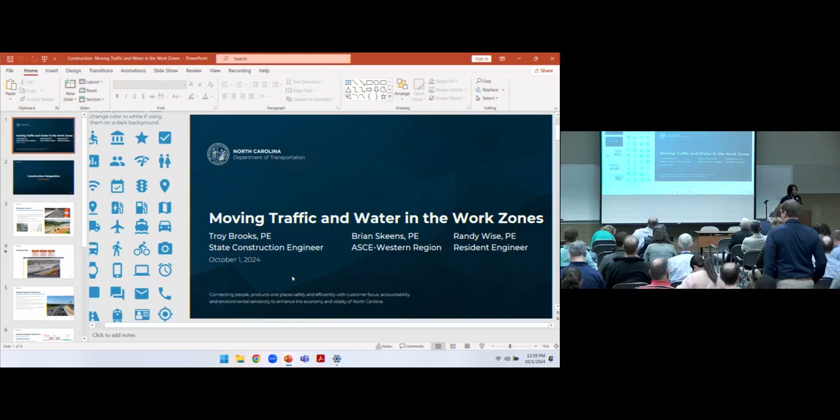All right, thanks everybody, we got a good crew here today. We've got construction, Brian Skeens and Troy Brooks from construction. We got Randy Wise from ICE, hydraulics will be me, and we got Justin Beaver from Work Zone Traffic Control, and Michael Lindgren from Roadway. We're just going to go through some presentations, talk about working in the work zone and traffic and water and how that moves through that area, and what we can do to make it better, to make sure we're doing a good job on our design so that the transition from design through construction and final completion works well. Looking forward to this session, and I'll kick it off to construction here, Troy.

Thanks Matt, I'll get her fired up here. My name is Troy Brooks, I'm the state construction engineer for NCDOT. I've got with me today Brian Skeens, and you're going to hear from him in just a second. He's the assistant state construction engineer for the western region of the state. I wanted to first thank the technical services group for inviting the construction guys up here to give you a shout and give you a perspective on what we're seeing as far as moving traffic and water in the work zone. It's a huge challenge that we face, and we're going to get into some of those details, but we certainly appreciate the invitation and the opportunity to speak in front of y'all today.

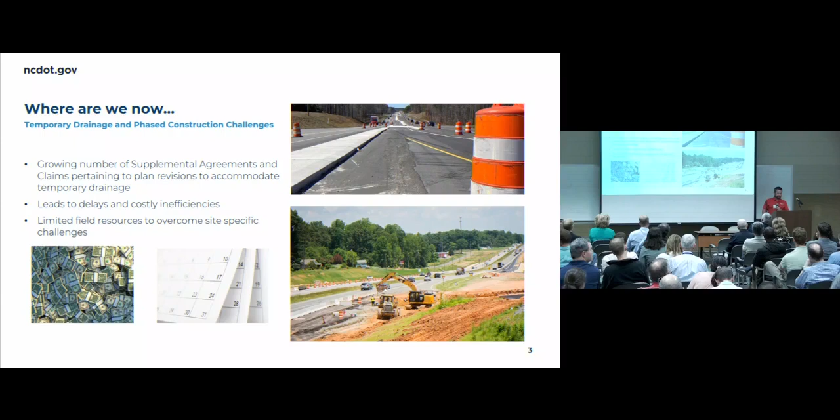So with that, I'm going to turn it over to Brian, and he's going to talk a little bit about what we're tasked with, managing risks, our folks in the field, as well as the contractors and their project teams as they think about managing risk. And we're active, we've got a contract and we've got a set of plans, and we're getting to work.

Yeah, so obviously, as a department, our number one priority is safety. Safety of the traveling public in these work zones, and dealing with the water, just in a normal rainfall, not anything like we've experienced last week, but just normal rainfall.

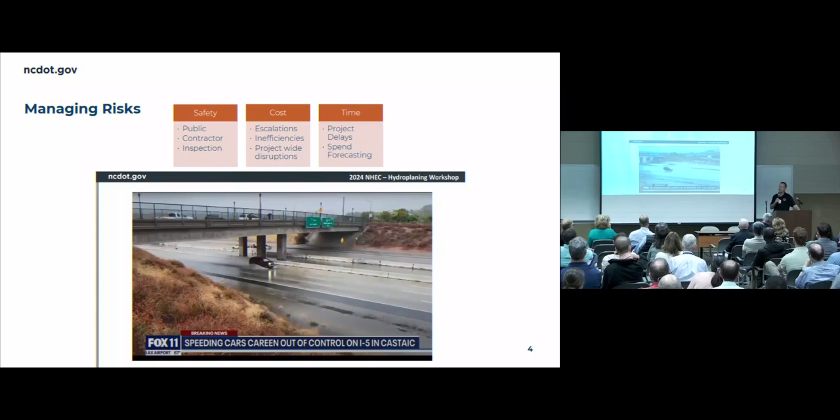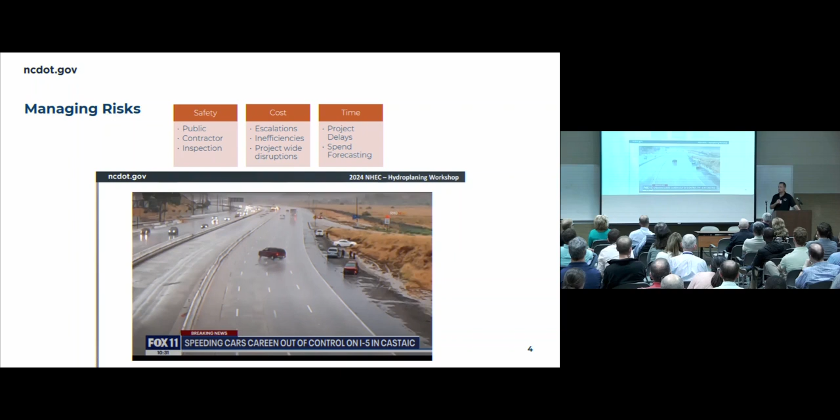I think about projects like I-26 in Buncombe and Henderson counties. It's very narrow through there. There's portable concrete barrier in the middle, slopes up on both sides, and just not a lot of room. And when it rains, it can get kind of hairy through there, multiple backups and multiple accidents. So just think of those things as we're looking at temporary traffic shifts and wedging. You think about wedging and the different stages of wedging that have to take place. It doesn't always get accounted for, like where's that water going to go once you build up on one side or the other?

We think about our contracting folks out there trying to do the work and trying to avoid getting caught up in an accident. We've had several fatalities recently, not necessarily due to water situations or drainage in general, but just contractor fatalities and our inspection staff that are out there trying to make sure these projects get built. So again, safety just needs to be number one.

But then, things that we run into that we have to try to manage on these projects, cost is the big one. These projects are certainly not getting any cheaper. They're more and more expensive now than they've ever been. And then when you tack on having to make adjustments and make changes in the field, that just leads to escalations. They're wanting more money. Materials are going up.

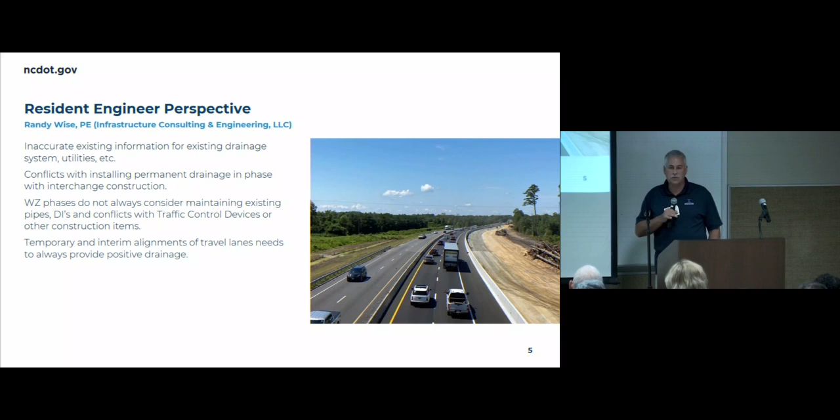The last point I've got, kind of the same but a little different, is that as you go through each phase, especially for traffic control folks, make sure each phase can control and has positive drainage. So you're not flooding the roadway for the traveling public, and you're not flooding property and so forth.

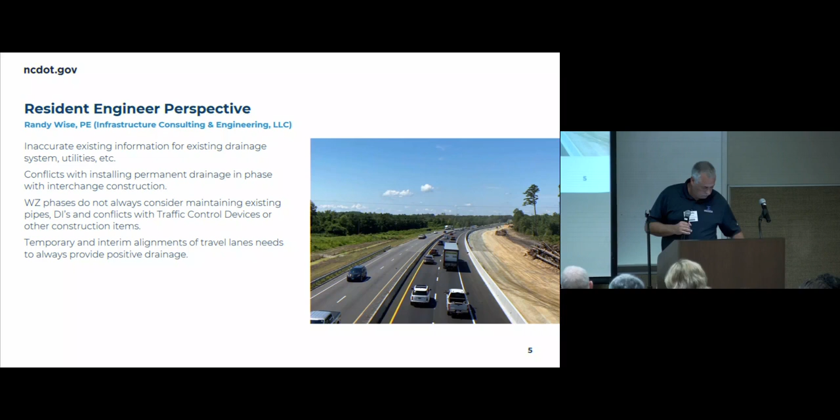So I've got a few examples, 3 particular items. This is a typical situation we ran into at some point. Basically, the premise here was to do temporary widening on the inside. This is a 4-lane to 8-lane widening.

Temporary widening on the inside, shift traffic inside, do the construction on the outside, finish the inside. Very simple. The problem is when you push traffic in and you're supposed to do the widening on the outside, that final surface elevation in this particular case, as you can see on the drawings, is 7 to 8 inches higher than where the traffic is. That becomes a problem, especially when no temporary drainage was accounted for.

In areas such as the west, it may not be as much of a problem because you have more grade. When you're down east, you have a lot of flat area, a lot of level grade. And so this water can accumulate and potentially flood the entire road in not-so-big storms.

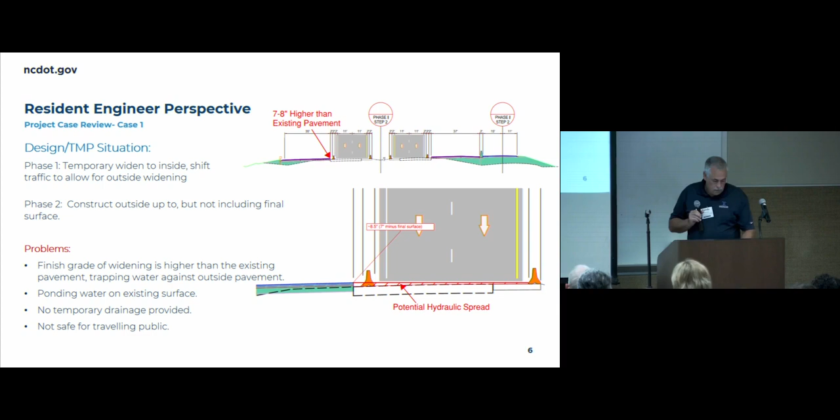So it's things like that that we have to deal with in the field, where many designers say, well, they'll just handle that in the field. But like Troy mentioned earlier, sometimes that's costly, and sometimes it creates a lot of delays.

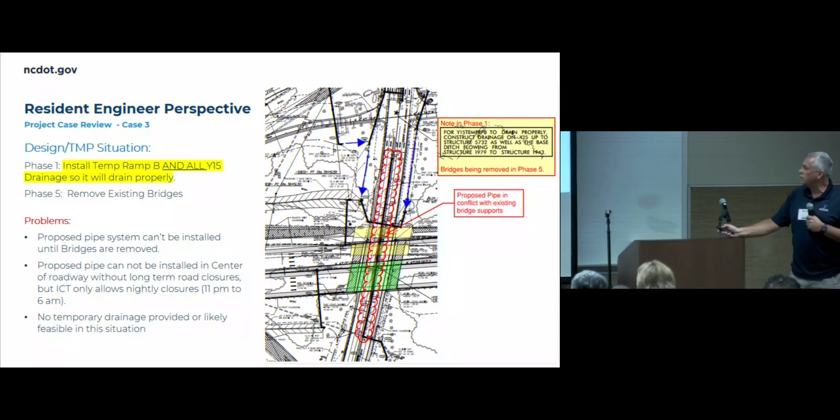Does anybody see the problem with that? So down here's my bridge I'm building. Right here's where the existing traffic is, southbound, northbound. So the drainage has to go in phase 1, but the bridges don't come out till phase 5. Drainage goes right under the existing bridges, right through the existing bents of the bridge.

So it's not really buildable like it is. It's a large pipe, 54-inch, about 10 foot deep. So you don't really have room to even place that under the low existing bridges, even if you could eliminate one side or the other.

So just things to think about. I threw 3 problems out there. They're going to talk a little bit about solutions, not necessarily about this, but some of the things they cover and some of the things I think traffic control has asked of the designers. Hopefully some of these problems will go away. I'd leave you with 2 things to think about: if something don't look right on the plans, it's probably not. Had another situation one time with an interchange, had a box in each corner.

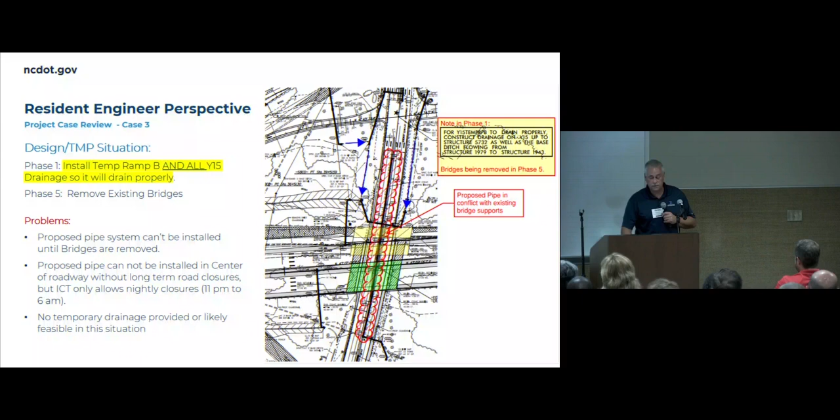They were all four connected with a pipe. That's not possible hydraulically, if you think about it. So if something doesn't look right, it's probably not right. Get out and look at projects, look at construction that's going on. I'm sure any resident in the state would be glad to have you come out, walk you through the project, see what you see if you see problems. Could be your project, could be somebody else's. I think there's things to learn on all of them.

You want to take questions or pass it on?

Looks like you, right?

My name's Justin Beaver. Ken is not here today. He's helping route traffic for the hurricane out west. So he called me this morning and said, hey, can you do this? So bear with me a little bit. We're going to talk about temporary drainage in work zones as it applies specifically to the TMP designers, and move forward with some examples.

Quick disclaimer, you're going to see some examples of plan sheets. It's not calling anybody out, that's just what we had readily available. A lot of these plans went through the field inspection phase, and some of these issues have already been resolved.

So first thing I want to touch on is chapter 1 of our TMP design manual, which talks about drainage specifically. I copied some language from that - you see highlighted here that all drainage issues need to be addressed by all units. That's one of the things we struggle with a lot, the coordination between roadway, hydraulics, signals, all these groups. It's up to the TMP designer to catch those things and not necessarily find the solution, but pose the question.

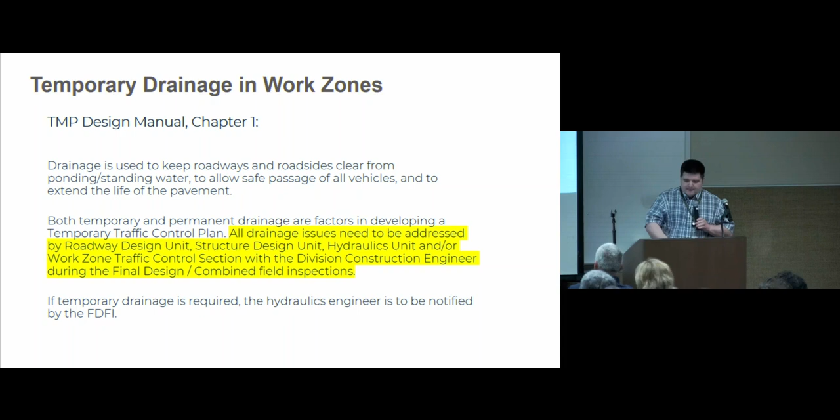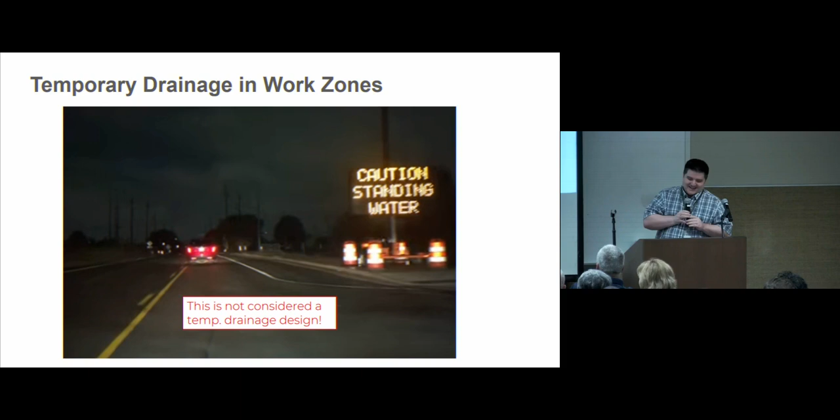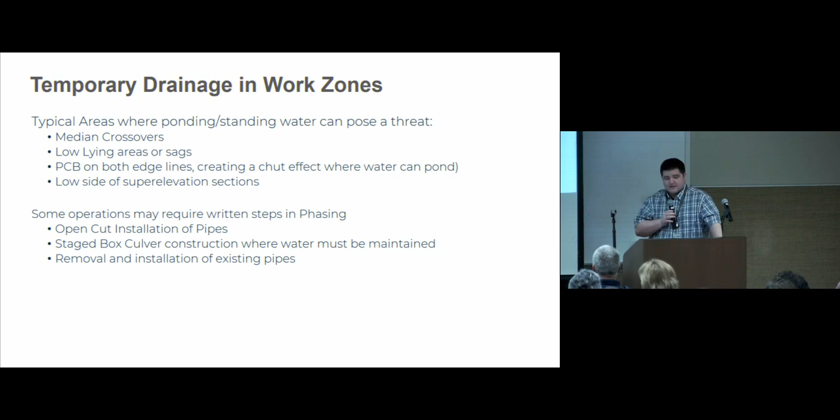So another excerpt from our design manual covers common areas where you might find problems with temporary drainage that you might want to look at a little closer. Just listed some here: median crossovers, sag areas. Some of these are obvious, but sometimes they happen without you knowing. With PCB, we use that a lot, especially in urban areas, and that can pose a big issue. Other areas that have to be spelled out in the phasing: open cut installation - I think Brian alluded to that earlier - stage box culvert construction, and pipe installation, especially wet utilities. That's another big thing we've had recently.

So when thinking about drainage, location definitely matters. Just a few examples here: in the western region, you have a lot of steeper slopes. A lot of times water gets off the site quickly, but it can cause channelized flow instead of sheet flow across roadways, and that tends to cause more hydroplaning. In our central region, between Charlotte and Raleigh, we have a lot of multi-lane highways - you have spread issues, you have a lot of super elevation issues when you start dealing with construction. And then out east, as Randy alluded to, you have a lot of ponding of water because there's no fall. So depending on where you're at, you might have to propose different solutions to TMP designs.

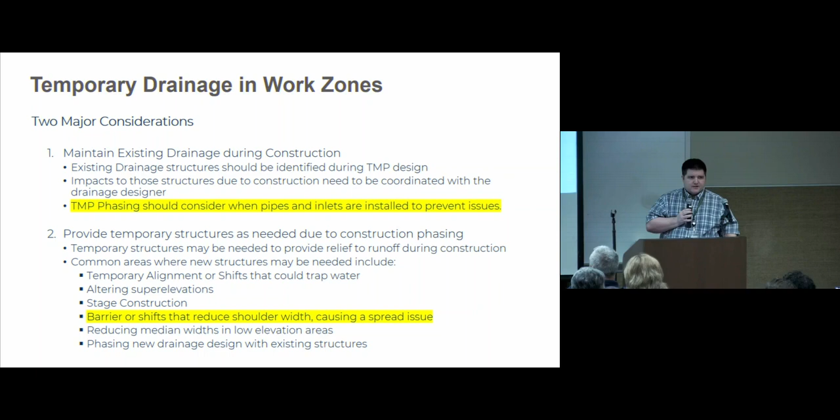The big takeaway here is there are two major considerations when you go into a TMP design regarding temporary drainage. First is to maintain the existing drainage during construction - that's identifying the existing structures, making sure water still collects in those structures, and making sure impacts to those structures during construction aren't affecting the existing drainage of the facility. The phasing should consider when pipes and inlets are installed to prevent issues. The second big takeaway is, if the existing drainage is not adequate during construction, to install temporary drainage to satisfy it. There's a lot of issues where that's brought up. A few things I'll list: stage construction, temporary alignments, barrier shifts. Spread is a big one, especially on bridges. Curb and gutter sections is also big, and you'll see an example of that later.

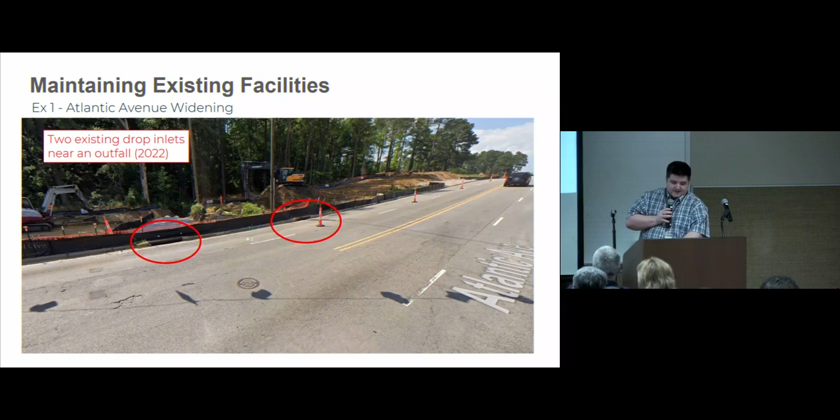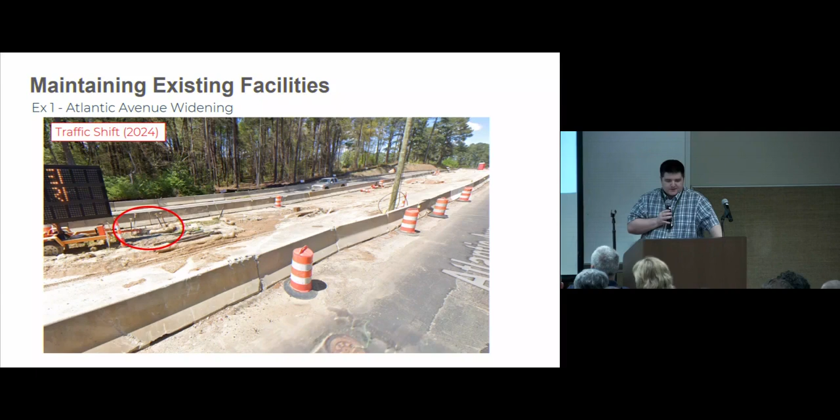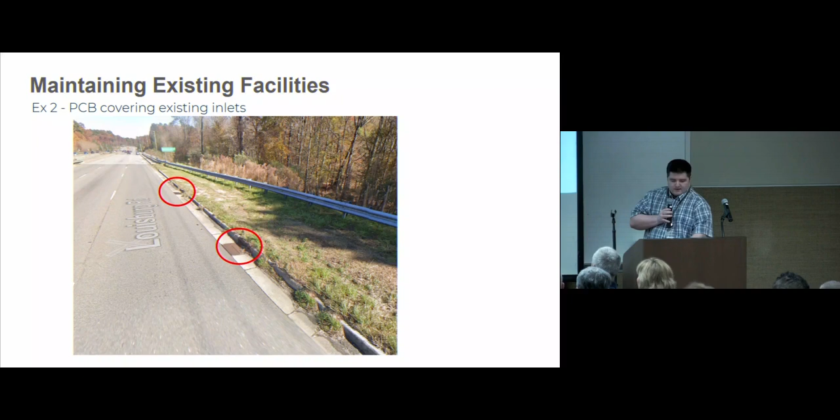Another example here, you see there's two inlets approaching a bridge on the curb. We're having to widen this bridge, so we're having to put PCB and fix the slope. Well, when we put PCB, it goes right on the curb line. A lot of times what this causes is the inlets to be jeopardized and water not able to flow in, and you have spread issues and ponding of water in the lanes.

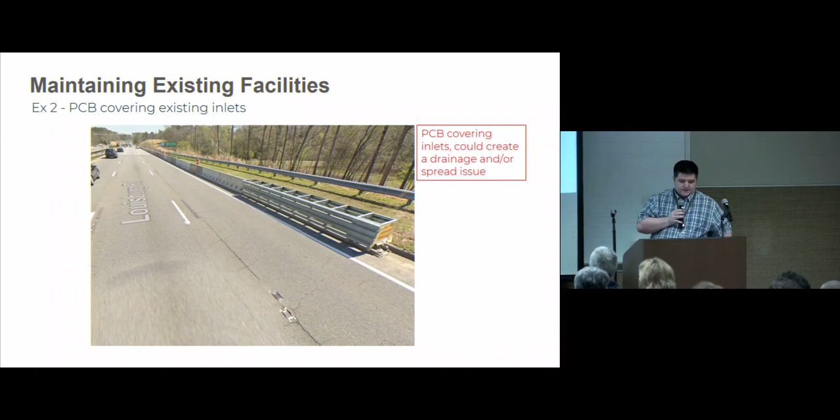Something you can find out pre-plan is, hey, does this require temporary drainage? Like I said, it's not our concern to solve the issue right away. What we need to do is ask questions to the drainage designers of, does this need to be addressed?

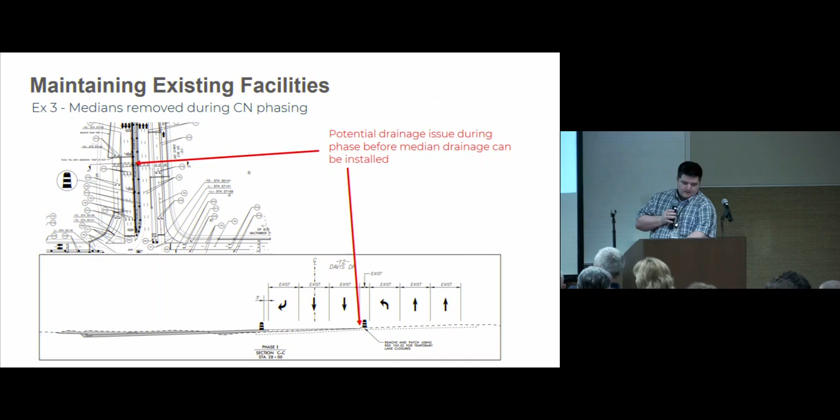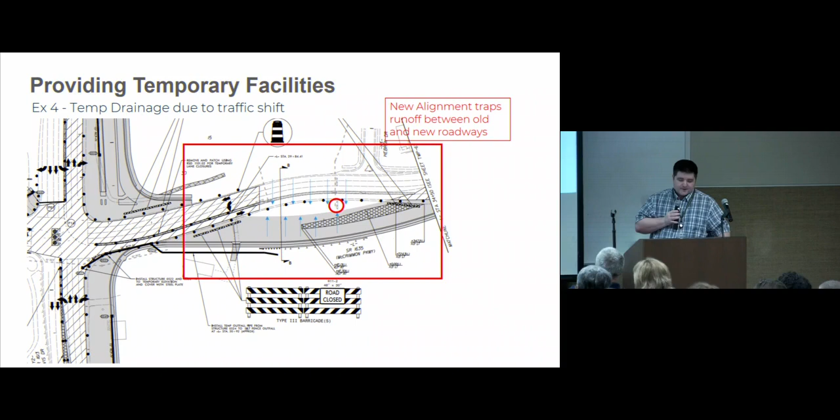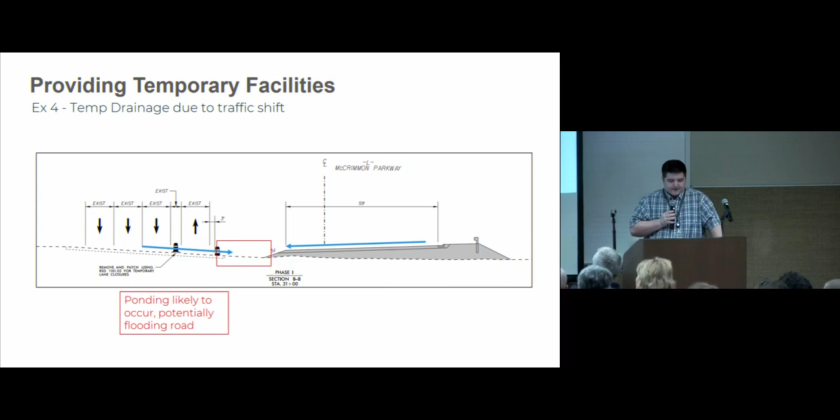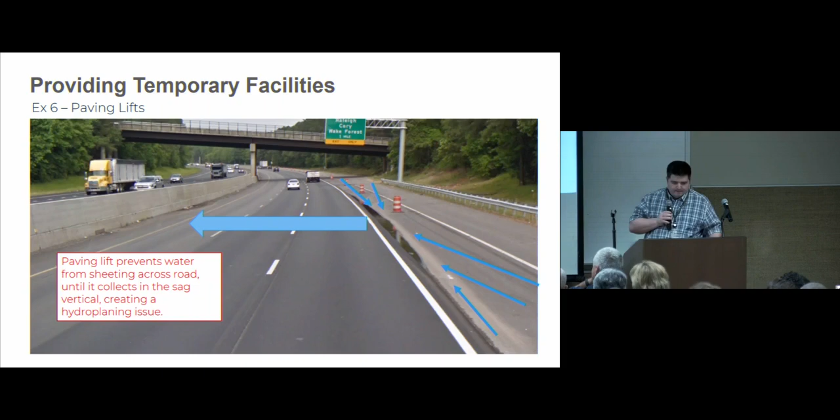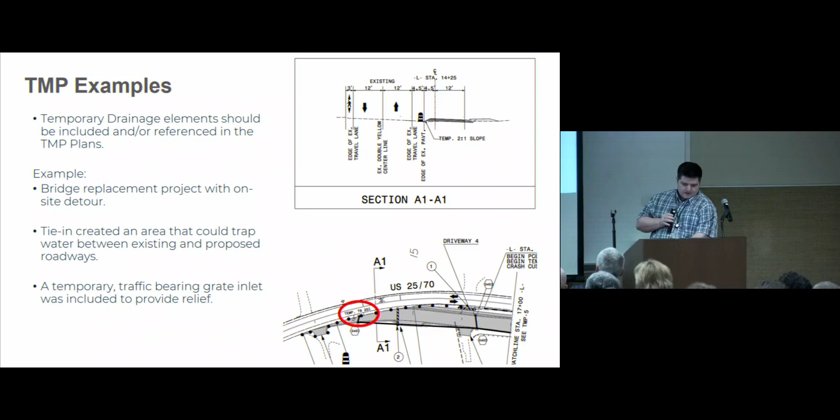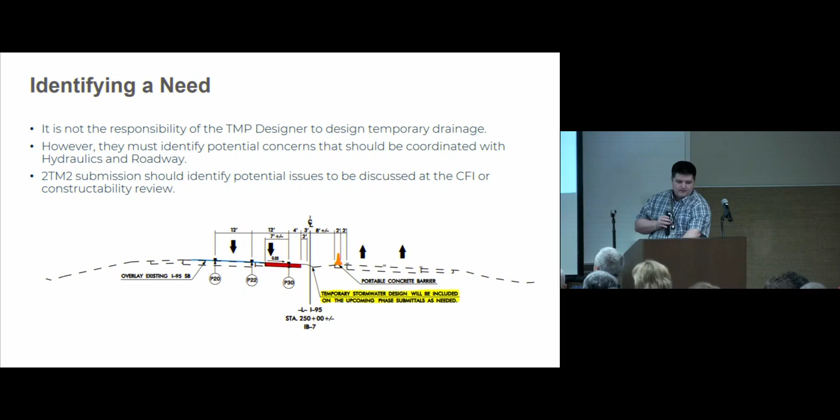So I want to talk about temporary alignments real quick. That's one of the things we've talked about recently. Typically, whenever we send a temporary alignment to roadway to design, they'll design the alignment, they'll send it to hydraulics, and hydraulics will look at whether temporary drainage is needed.

So this is one of the key points when you're doing TMP designs. If you encroach on medians and take away some of that drainage area, then you should ask the question to drainage, hey, you should look at this.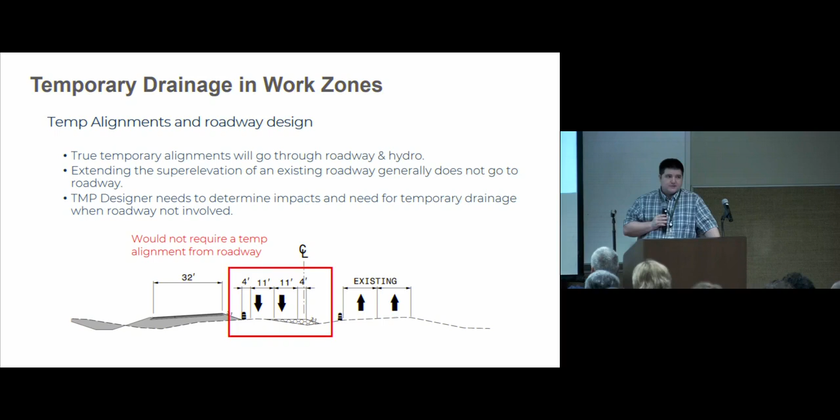A couple things we tried to accomplish in our PDN process, this is our 2TM2 and 3TM1 with WorkZone specifically. We have language in there that does cover that it should be looked at, temporary drainage. And it's not always accomplished. Just highlighted some areas here, you can read them if you can see those.

Another thing to cover too is the 2TM2 part of design. Those plans, I know we went from like a staging to a 50% to a 90% and to a final. Now we just have 2TM2 and 3TM1. We're really kind of expecting the 2TM2 to be almost what 50% used to be, not necessarily what staging was. And the idea there is that we want enough substance there to be able to review it at CFI and not have too much there to talk about.

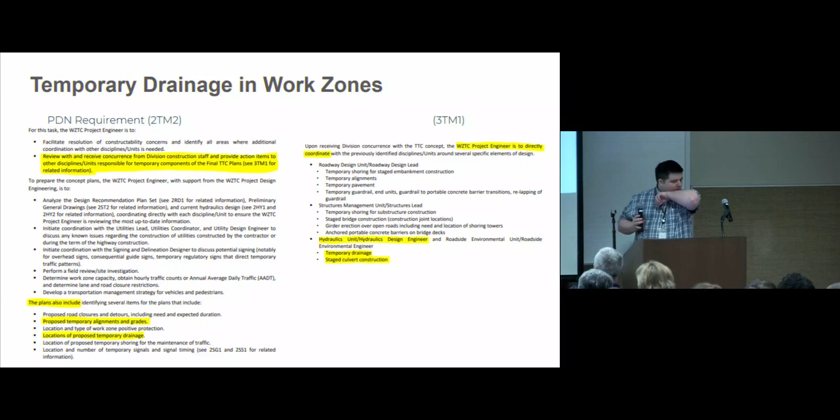So some things we've talked about internally about moving forward. There's our man-day estimates, the kitchen sink that has all the things you can put time into. We talked about maybe splitting this out to coordinate as necessary with the other discipline units and to be more specific, so you can get paid for all the coordination efforts you may have to do with drainage and signals and those facets.

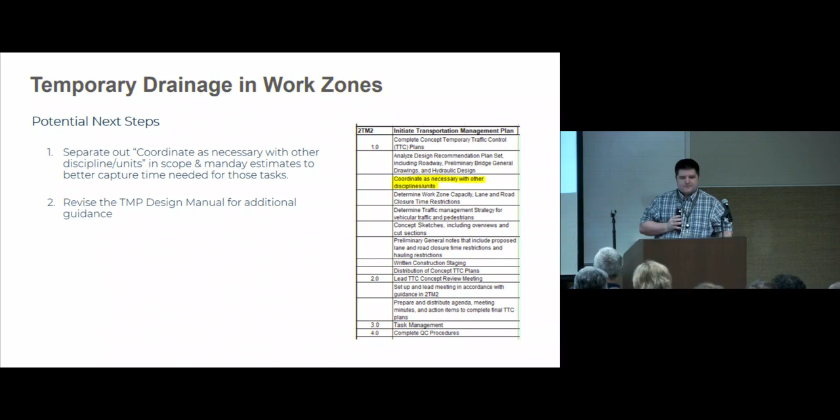The other thing we're looking at is revising our design manual, and that's a distant task, but it's something we're stepping through. And then finally, just our 2TM2 checklist and 3TM1 checklist. You can see the highlighted areas where temporary drainage and drainage pipes and new structures are listed there to check on, just as a reminder that these do exist. And this is our 3TM1 checklist.

And that's all I've got today.

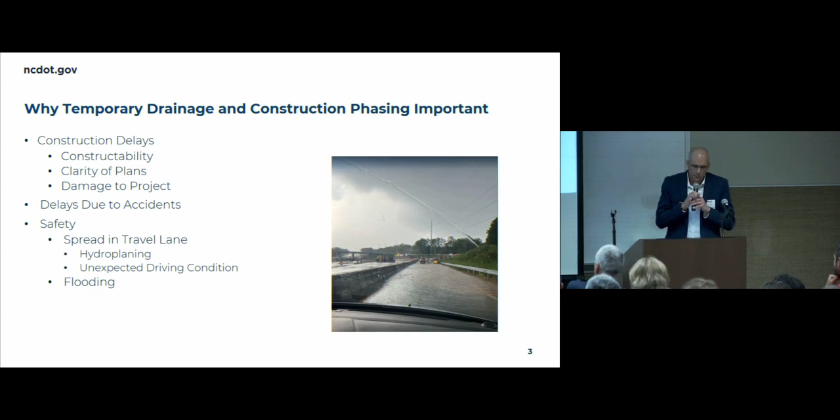And then again, mentioning flooding - it can be really dangerous, definitely. We had an issue on Florence and I-85 where it turned into a canal of water. There's two feet of water in between the Jersey barriers, and they're just having challenges getting out. So as we design those PCBs and things, are there outlets to let that water come out? It's a team effort with construction and design to move through that process.

So as we talk about the hydraulic deliverables for traffic management plans and construction phasing, drainage design - we've got detour alignments, median crossovers, phased bridge construction, widening projects, that type of thing. And then we've also got culvert replacements or extensions and how we phase that with the construction, which is also coordinated with the erosion control plans.

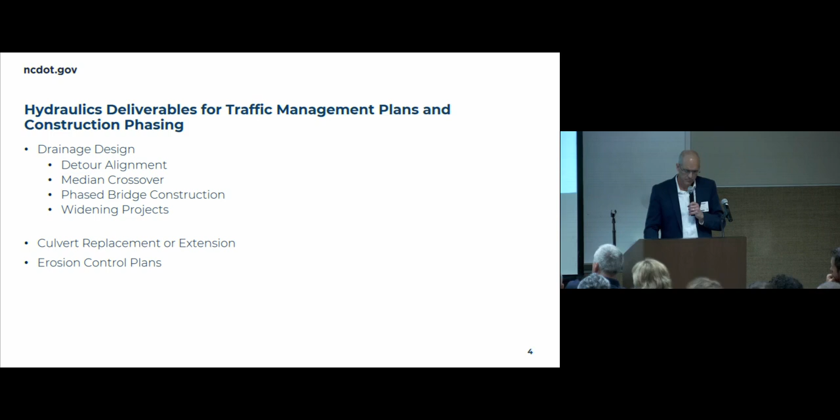But I really wanted to emphasize this. This is just, what is the communication of all the people that are involved? And as you're doing design, are you having some sort of connection with these folks?

So we've got roadway, we've got work zone traffic control there, but we work with roadway, construction, there's hydraulics there. They should be communicating with these other disciplines. All these disciplines shown here: roadside environmental, structures, geotech, utilities, construction - you can see how they all integrate. As you're doing your design, you should be thinking about, can these other disciplines work out with what I'm doing here, and how does that look?

So I just put that little directory over there in the bottom left-hand corner, because it's really good to just - if you want to talk to somebody at DOT, just type their name in there and look it up, and they'll answer. So communication is extremely important as we go through this.

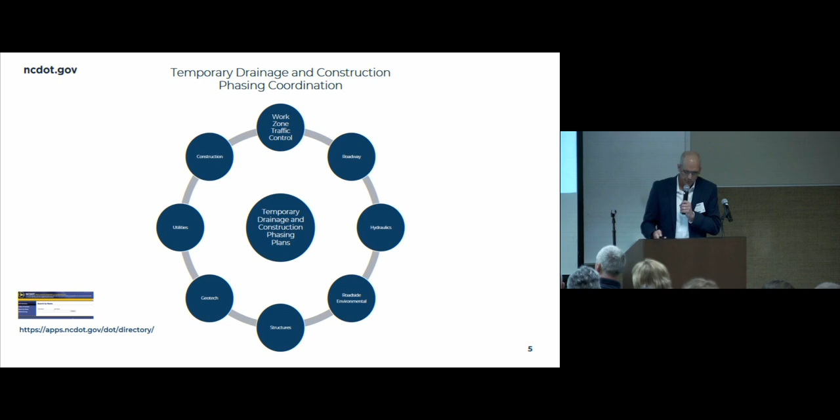So we made some PDN updates. We're going through those right now. And generally, they're just to encourage and coordinate and add additional specifics. So in 2HY1, delivering the preliminary hydraulic recommendations, no major changes there.

However, as the hydraulics engineer, as you're working out there, as you're doing your preliminary design, just think about how am I going to build this structure? What are the implications of maybe some of the preliminary stormwater control plans that I'm doing, things like that, as we build the RPS. So just something to think about.

In 2HY2, in completing the drainage design, we've got pre-design meetings, so there's some things you can talk about there as design engineers. What are we looking at as far as drainage? Is it a widening project? So we know we're going to have additional coordination with work zone traffic control. If it's with roadway and we've got a roadway detour, then we know we're going to be working on that as well. And then we've got our hydraulic survey reports, and then drainage plans and field inspections.

So we did add: construction phasing is required in conjunction with any culvert survey reports to demonstrate a temporary drainage plan that may be used to maintain flows adequately during culvert construction. So there's additional language in there for the construction phasing of culverts.

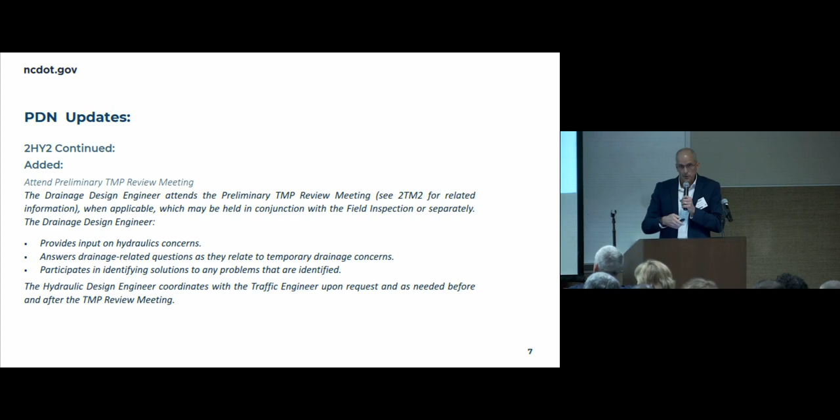And then additionally in 2HY2, attend preliminary TMP meeting. So this is what Justin was talking about with 2TM2. And just make sure that we are coordinating really well with our work zone traffic control folks. So again, just emphasizing the importance of, can we build this well, and can we maintain traffic on it? And it's a two-way street, right? We should be going back and forth with these things.

And then in 2HY2 we also added: the hydraulic design engineer should be proactive in identifying drainage-related project concerns or opportunities for improvements as early as possible and communicating these to the project team for consideration.

So you're going to have to be reaching out to utilities, you're going to have to be reaching out to roadway, you're going to have to be reaching out to work zone traffic control, construction - how are we going to do this, and will it work?

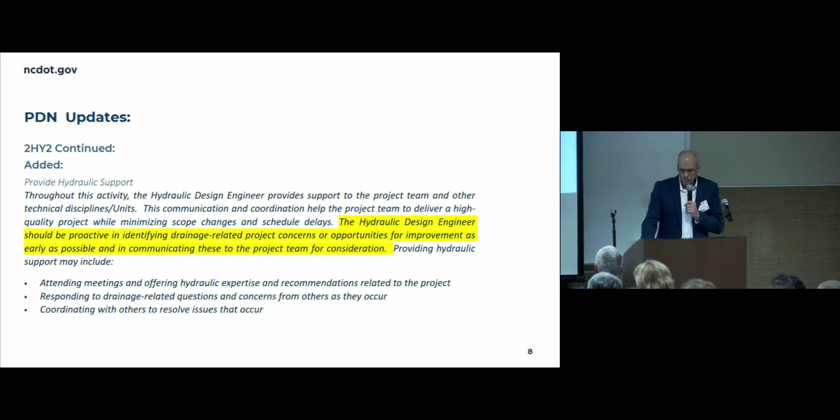And then finally, just some of the other things with 3HY1 and 4HY1 - we're just emphasizing coordination with the disciplines and deliverables for Plan in Hand set.

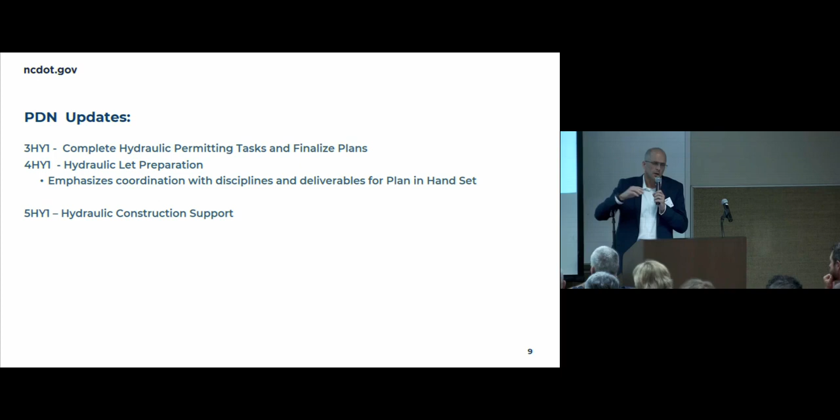I do want to mention on 5HY1, hydraulic construction support - I think the engineer of record that's doing the drainage, as much as we can, we should continue that consistency into construction. In a lot of projects I did in design, back 5-10 years ago, I'd make sure that as we work with our PEFs, we would continue that communication, that coordination into construction, making sure that from a hydraulic standpoint, they were available for any questions that come up during construction.

We have a lot of phases during construction, but there's that in-between phase, and sometimes things need to be done. It really helps if that hydraulics engineer is on call and can come out in the field and help support those conversations. So I would recommend that practice. If you're a design engineer on a project, as that project goes to construction, it'd be great, especially if it's more complex - like the risk on that, like an interstate widening or something like that.

So let's talk a little bit about characteristics of good temporary drainage and construction phasing plans. Again, coordination, thinking through the phases of construction.

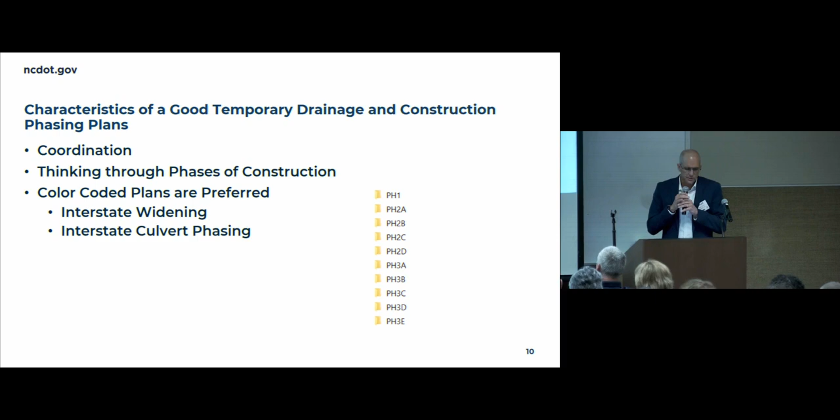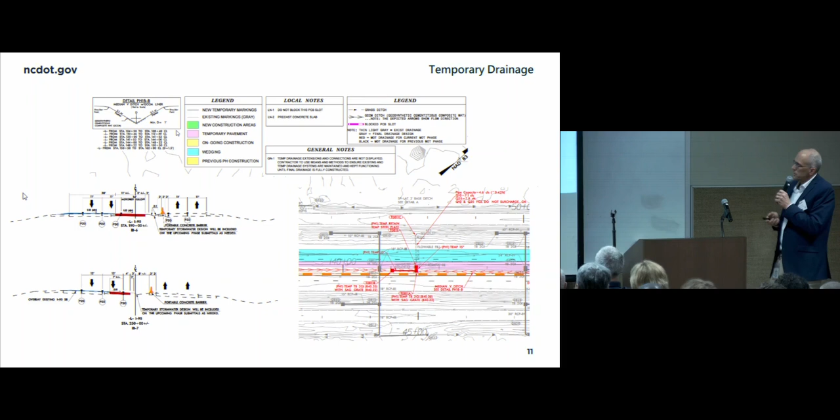And I just want to bring this up because I think it emphasizes the importance and the detail that goes into these designs, that should go into these designs. So you've just got your cross sections that are colored. You've got a legend that's colored, and a lot of the detail in the PCBs - where we're going to place, block the PCBs, where we've got to keep them open. You've got the design on there of the final design, but then you also got the temporary design. But this type of thing, this level of detail is extremely important. You've got flows, capacities here.

You can tell this project's been thought about, and the color phasing. Especially, we're not going to do this on every project, but interstate widenings - if you're working on a project like that where we've got to move traffic back and forth, just know that this will really save a lot of money if we go through this in design so construction can follow these processes.

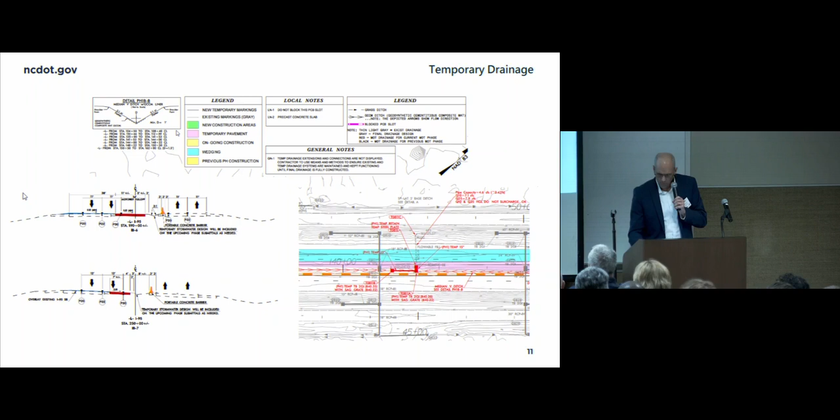So let's just talk about spread and travel lanes. The goal is to meet the guideline requirements in final design. Michael's going to talk about that a little bit, but when we're building our highways and roads, especially on interstate high speed facilities, no spread in the travel lane. I know we have it out there - we've got it on I-95 and things - but the safety of the public is a concern.

So there are certain situations where we can't do that, right? It depends on the speed in the work zone, driver's expectations like I talked about, duration of that traffic pattern - how long is that going to be in that shift? Is it going to be 4 months? Is it going to be 6 months? Is it going to be 12 months? So that goes into some of that decision making.

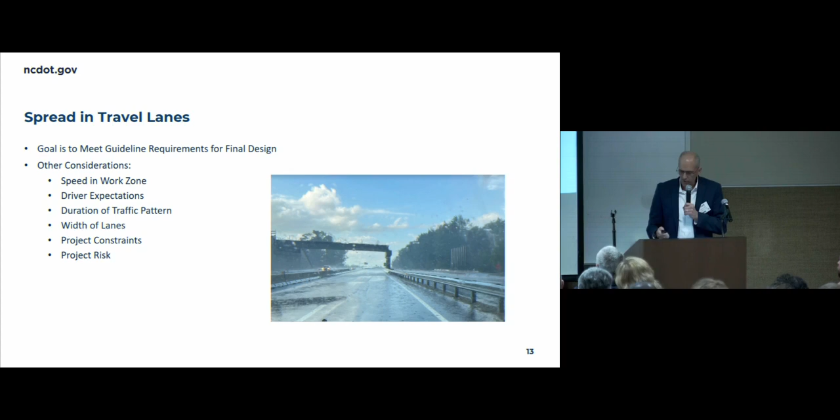Width of the lanes is also important - is it a 12-foot lane, 10-foot lane, that type of thing? Project constraints - there just might not be enough room out there. And then project risk - what is the risk if we do have an accident out here, or water's draining onto the highway? So those are just some of the things we need to think about as we're going through that process. So, tools for design.

Hydroplaning assessment tool - I know on the I-95 project they were using the HAT tool. HAT 2.0 is now out, we'll be doing some training on that, but that's going to be good for planning, design, but it's also good for temporary drainage and looking at what kind of spread or water film thickness am I looking at on the highway, and is it going to be a problem.

And then there's the FHWA hydraulic toolbox. That's a pretty handy tool. And then also there's additional capabilities in drainage utilities and things on that end.

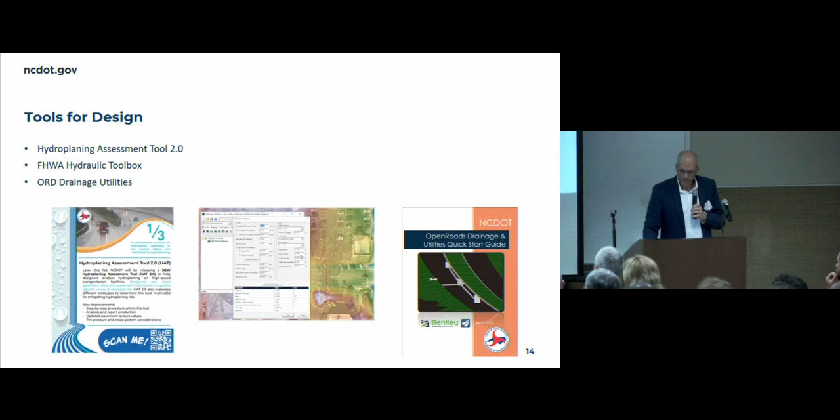So what's the road to success look like? I think just apply the appropriate level of effort and thought to the project at hand, so that's going to vary. Good coordination from beginning to end - as a designer, reach out and think about utilities, think about coordinating with roadway and work zone traffic control throughout the process, and then construction - can they build it? Engage the correct level of resources, and it's really important to provide that hydraulic construction support as we go into building these projects, as necessary and as the risk of the project requires.

So with that, I will turn it over - either Andy Jordan, our assistant state hydraulics engineer and designer, or myself can answer additional questions if you have them. So with that, I'm going to turn it over to Mike.

Thanks, Matt. My name is Mike Lindgren. My history started in 1992, about 50 feet from where I stand right now, at the Century Center. Worked for 10 years down at DOT, then spent 20 years out in private industry, and I've been back for a year and a half. So I'm excited to be back and looking forward to continuing to help improve our guidance, oversee the roadway design manual.

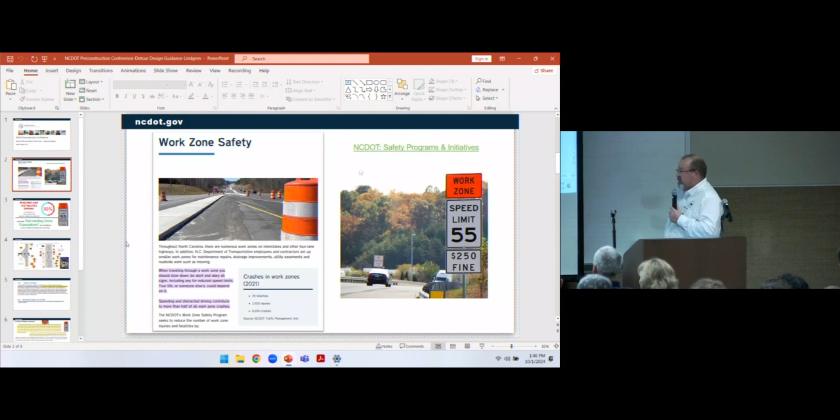Thank you. And DOT has a lot of safety initiatives. This is one, there's a link up at the top there if y'all get this. They have a link that gets to a lot of the safety initiatives and programs. And it was really impactful to me to go through it all. There's a lot of safety information out there, especially with the gravity of what's happening out west and feeling for those people. I kind of feel the same way about the fatalities that happen on our highways. So that's always in the back of my mind when I'm starting to think about the guidance and how we can change it and make it better.

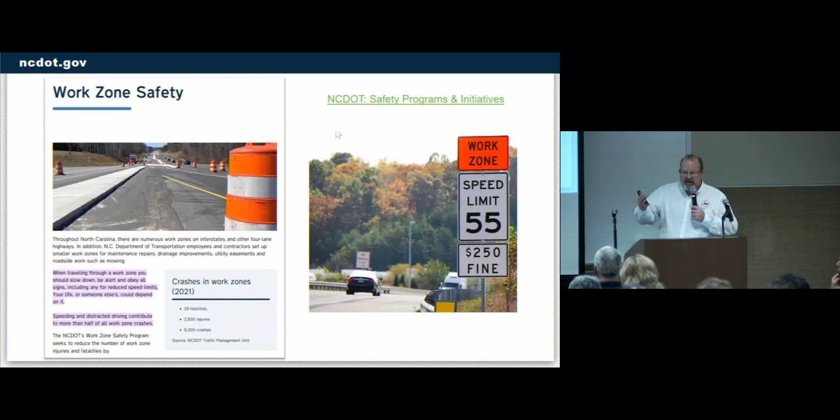One thing on here that kind of struck me was about speeding and distracted driving contributing to more than half of all work zone crashes. And I'm putting this speed limit sign on a lot of these slides because it is important to communicate between the roadway design engineer and work zone traffic control what the design speed is that we're providing for their work zone. If we tell them it's 55 miles an hour or 45, they assume it is, and they sign it accordingly and put it out there for the public to consume, and the public expects that they're going to be able to drive at those speeds.

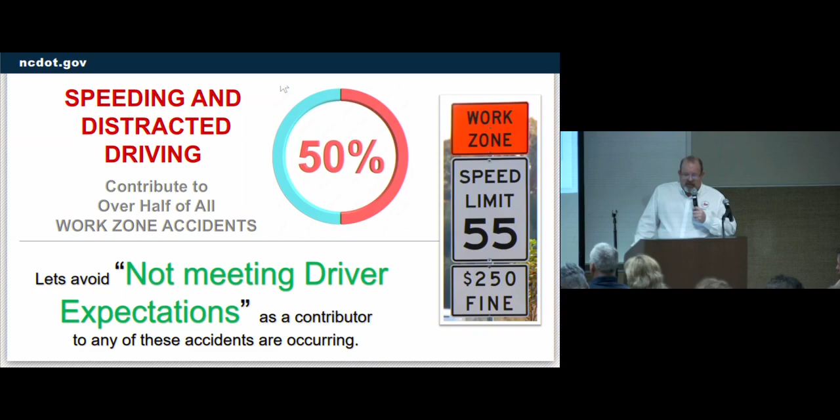Again, this kind of hit me - 50% speeding and distracted driving. As designers, we can't really do a lot about that, but everybody in this room can do their own part when they're out there. But one thing I'm focused on is let's avoid not meeting driver expectations as a contributor to any of these accidents that are happening.

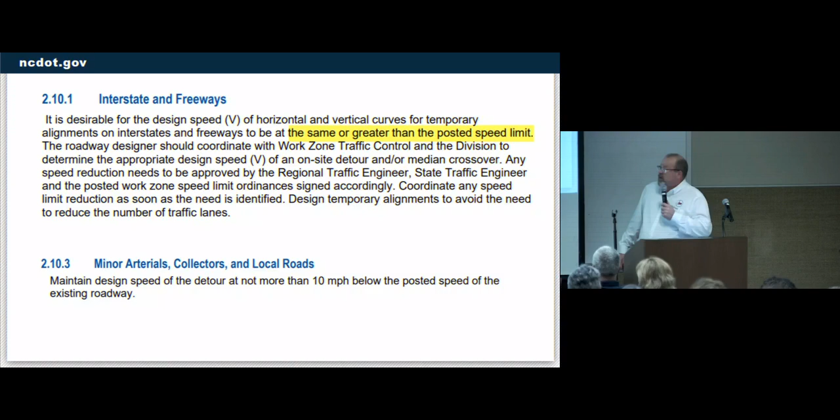The roadway design manual has guidance, and it's been this way for a long time: on interstates and freeways, it's desired to have the detour speed match the posted speed limit. So for our detours, we try to provide the same as the posted speed on these high-speed facilities. It's not always possible, but it has to be communicated with the regional traffic engineer, work zone traffic control, and the division to make sure everybody understands what that speed is. For minor arterials, collectors, and local roads, we can usually drop the speed 10 miles an hour.

A lot of words here, but I'll summarize. Through the documentation and research I did, the consequences of errors made at high rates of speed are generally severe. US DOT data shows that most fatal work zone crashes for all vehicles and large trucks occurred on roads with speed limits of 55 or greater. In a survey of several states, 75% responded and ranked improved guidance on traffic barriers and design as a critical element of work zone traffic control.

We're no different, so when we're designing detours, it's up to the engineer of record to communicate the design speed provided. One thing I've seen is providing the curvature for that posted speed without providing the superelevation that really reflects the effective design speed we're providing.

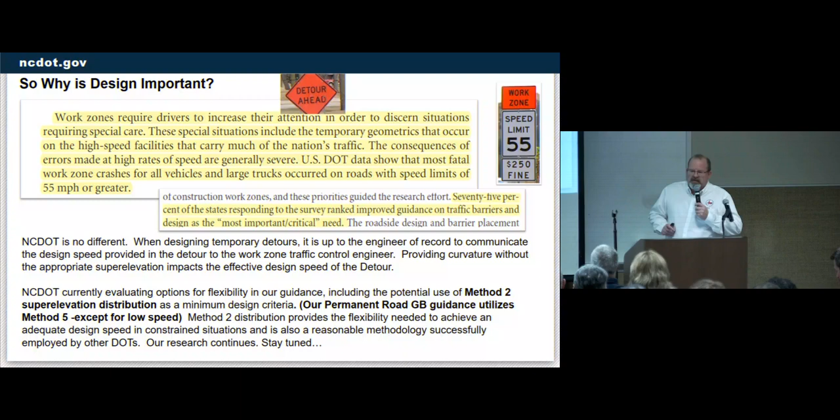So with that, through my experience with design-build projects, I learned about a report, NCHRP 581, that we are currently evaluating at DOT with work zone traffic control and others, which may allow some flexibility. It's guidance currently being utilized in other states, using Method 2 superelevation distribution for high-speed detours. Currently in the Green Book, that criteria, Method 2, is used for low-speed urban roadways.

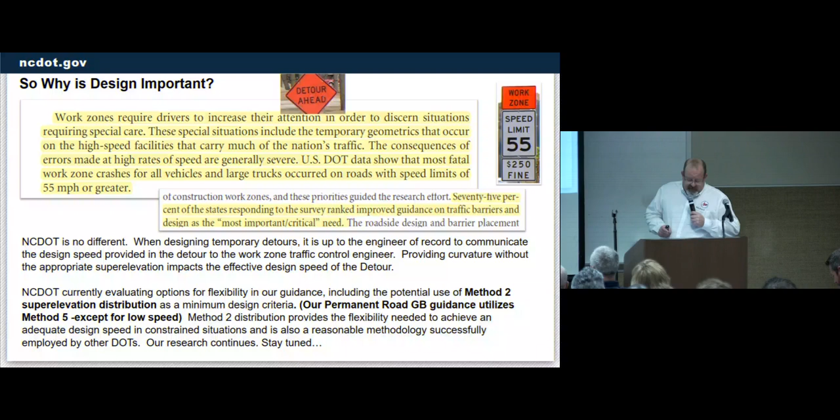But other states have used it for high-speed detours. Just for reference, Method 5 superelevation distribution is what the Green Book has in their basic design tables that we all use, except for low-speed urban. Method 5 is much more comfortable, but Method 2 is adequate. So we are working on getting buy-in to put that in our manual, and that continues. I just say stay tuned.

That is the report, NCHRP 581. Like I said, we're looking at it, trying to decide how to incorporate it into our manual. But in closing, we're all engineers and designers. If it's me, I'm looking at the possibility of using this Method 2 superelevation distribution as a minimum. I have something to stand behind rather than putting alignment out there without adequate superelevation. This method actually lets you tie to existing super rates a lot easier, and I know there's a desire to not have to wedge up and then remove. So that is roadway design's part of this. I appreciate it.

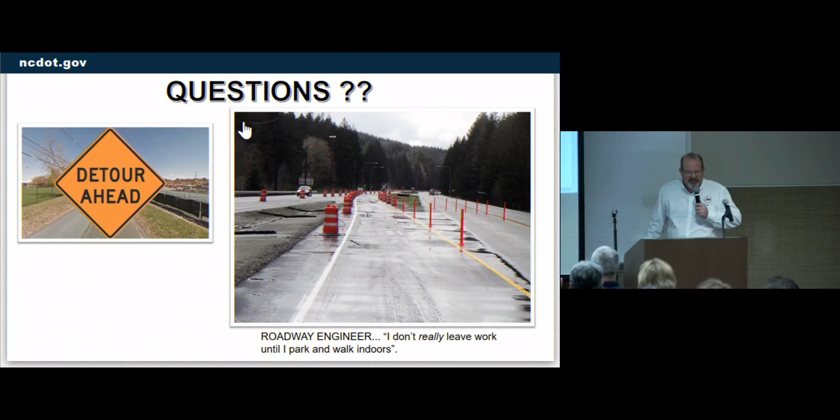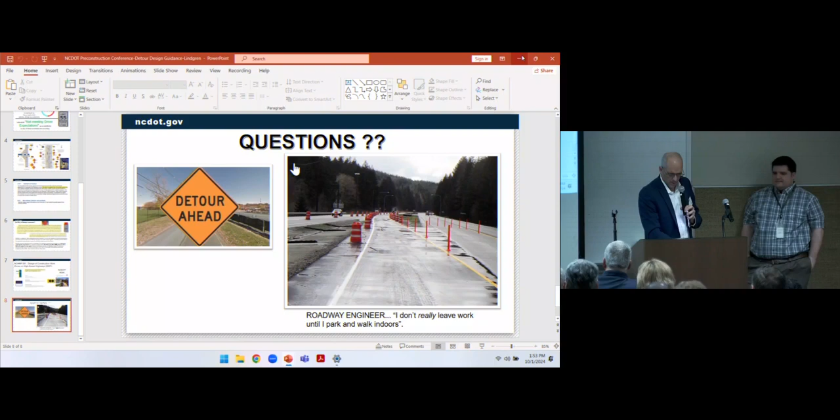All right, we've got part of traffic that's pedestrian, so Justin's going to come up and talk about that. Let's see here. Yeah, exactly. Where's my mouse?

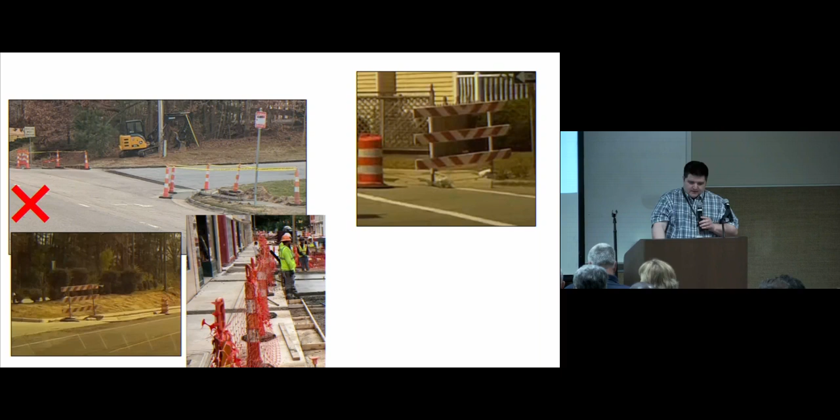Most of these are either type 3 barricades blocking a sidewalk, which is not ADA compliant, or you can see ballast placed in the sidewalk as well.

Just a quick coverage on this: we have 4 different levels of pedestrian accommodations. One is absence of need, that's if no existing facilities or worn paths exist, and if it's less than 10 pedestrians a day, we consider that absence of need, and you don't need to address pedestrians as part of the work zone. Nowadays, typically community impacts will do a determination beforehand to figure out what level of accommodation we may need to address, and we can pull it down later from, say, moderate to basic if needed. These are some pedestrian number thresholds. We do get pedestrian counts, so if you have a project where you think it may be a concern, you can reach out to us and we can get a pedestrian count.

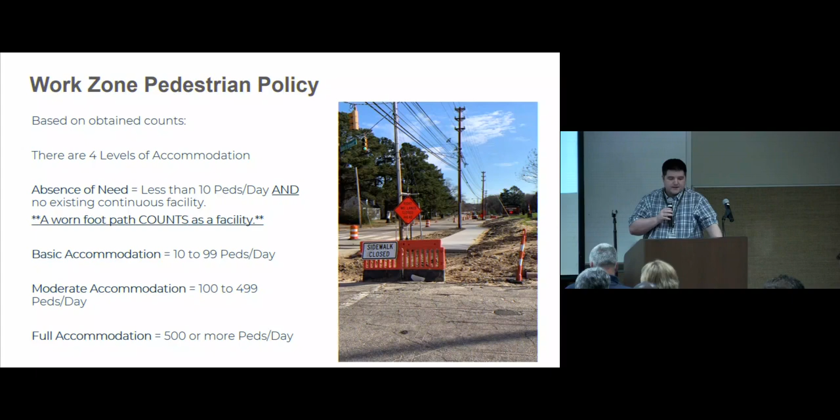Some other key points: walk the project, determine existing conditions, especially the worn paths. Sometimes you can see this on Google Maps. But if there's a worn path and no sidewalk, then the worn path is a sidewalk, so we have to accommodate pedestrians.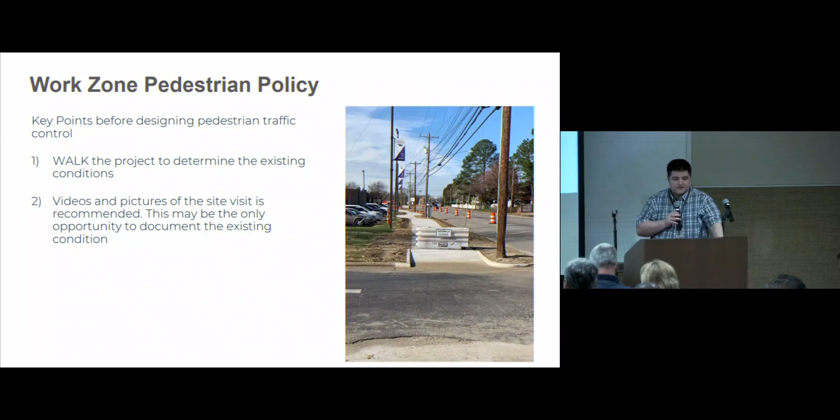Continuing the site visit, continuity is a big thing. We have a lot of developers who build subdivisions and put sidewalk all over the place, and it doesn't connect anywhere. If it's a discontinuous network, that's not really a sidewalk anymore. We don't want to build sidewalk to areas that doesn't connect anything and trap people with nowhere to go.

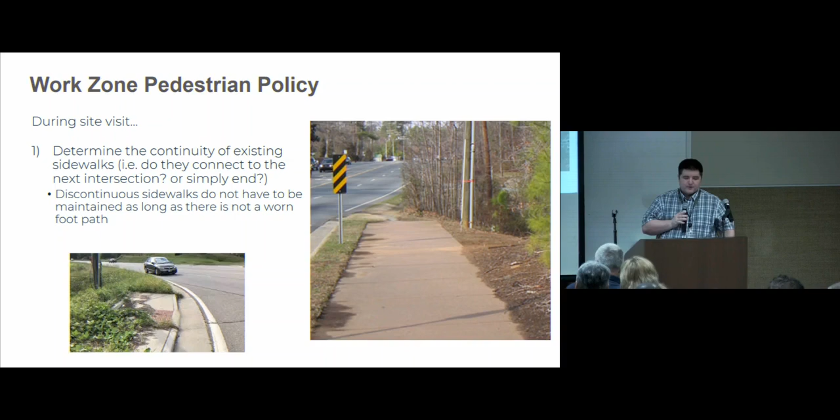We all love this one, it's a good sidewalk there. I'm sure that's ADA compliant. But just talking more on ADA compliance with the sidewalk: 4-foot minimum, however anything less than 5 feet has to have passing spaces. 5% slope, or I think it can also match the existing roadway.

And then check the condition of the existing sidewalk to see if it's free of roots and stuff. There's a lot of municipalities that will build sidewalk, and it's been there for 40 years near a mall, and no one ever uses it anymore, and it gets overgrown, and the concrete's ripping up.

But for TCP plans specifically, the big takeaway is, if you're still using SS4 on our TCP plans, we just updated that cell for pedestrian barricades. It no longer looks like a type 3. It looks like this, the top screen, where it's more of a square. Hopefully that solves a lot of problems in the field.

The big thing here is that 2-inch maximum clearance at the bottom. That's for wanderers who are visually impaired. The other thing is don't have ballast sticking out into the sidewalk. Some of these pedestrian barricades that you might see have legs that stick out into the sidewalk, and if they're tall enough, that's an ADA violation.

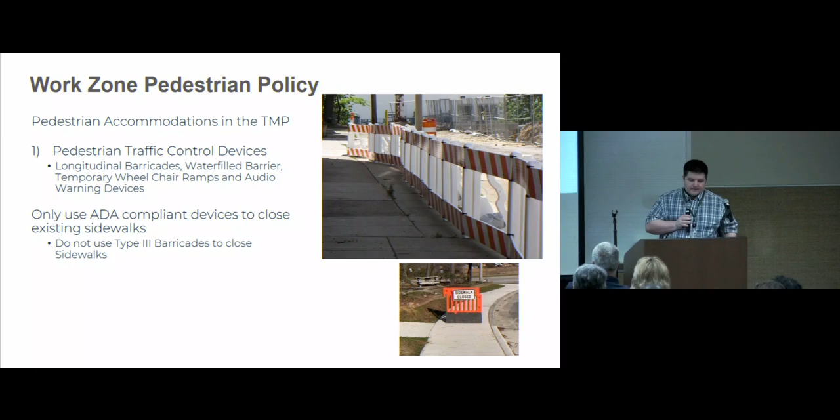Audible warning devices - for the most part, you do need to include them. There's some exceptions. If you're near a signal that has audible devices, you have to include them. And disclaimer here, if there's population in the area with sight impairment, then it's required as well. So just consider that when you're doing the revision for the ADA devices.

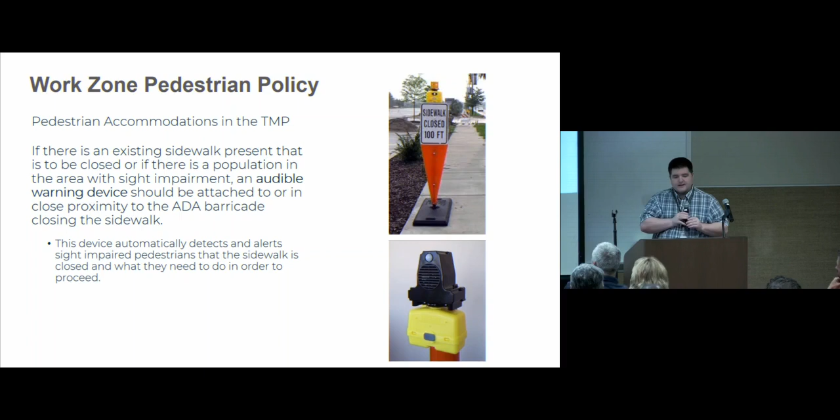One of the biggest things we implemented is to try to prevent us putting temporary sidewalks everywhere. Sometimes there's situations where it's very difficult to accommodate pedestrians by providing sidewalk, and there's so little traffic it's not feasible. What we have is kind of a ride-sharing program.

It's a pedestrian transport service, and what this requires the contractor to do is designate a pickup and drop-off location, and they can contract with any of the taxi services, Uber, whoever, but it's up to the contractor to do this. They have to put a sign where the closure is and give a phone number to call. The rider gets picked up, dropped off to that designated location, and that gets all charged to the project - they don't have to pay a dime.

Now, they can't pick up a ride and say keep going to NC State if you're trying to get through Wade Avenue. But it's something we've done, we put this in a lot of projects these days. I don't know if we've paid more than 50 trips of the probably thousands we've had estimated. Pedestrians, they're going to see the sign and walk around it.

What it does protect us, though, is we can close the sidewalk and provide access, so it is ADA compliant. So it satisfies all our obligations. But pedestrians are going to do what they can do.

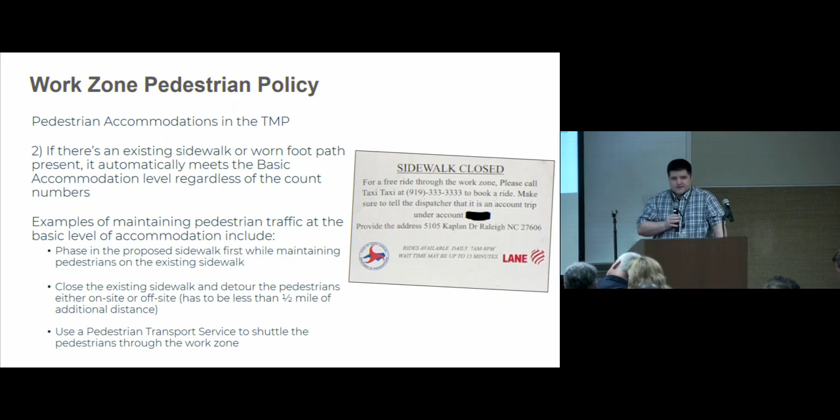So the other thing is like the interim sidewalks. If you're building a project, widening an undivided highway into a 4-lane divided or whatever, and you're putting sidewalk everywhere, try not to leave segments of sidewalk open that don't connect anywhere. What ends up happening is pedestrians will end up walking through work zones, or they'll cross roads at mid-block, and it creates a dangerous situation. The best thing to do is just leave those sidewalks closed until you can open it to a continuous network.

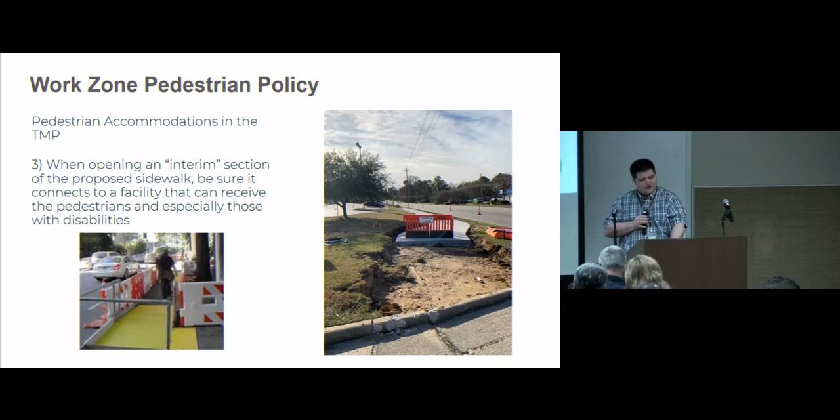Here's some good examples. You can see that barricade at the top to close the sidewalk. There's no extruding legs onto the sidewalk - it's a 2-inch maximum from the bottom there. And then you can see the pedestrian and bicycle detours. On the right here, I believe this is Greenville, where they had to basically redo the entire roadway but had to maintain access because it's more of an urban center.

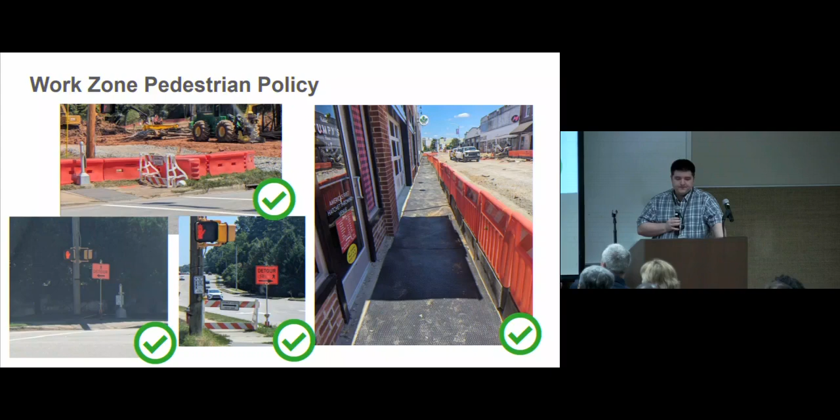That's all we have for pedestrians. And turn back over to Matt.